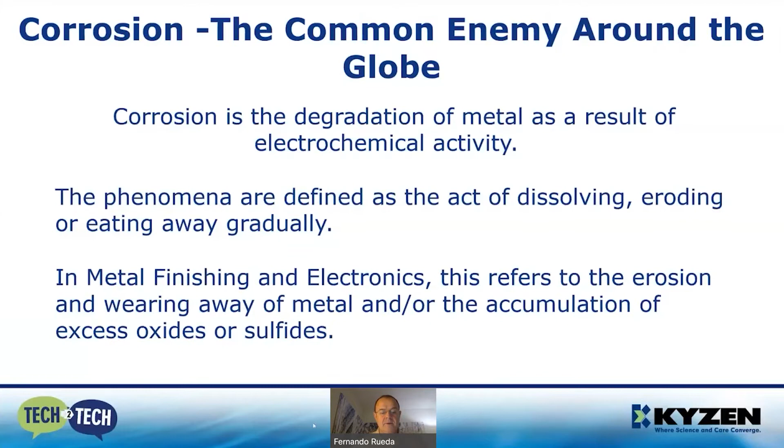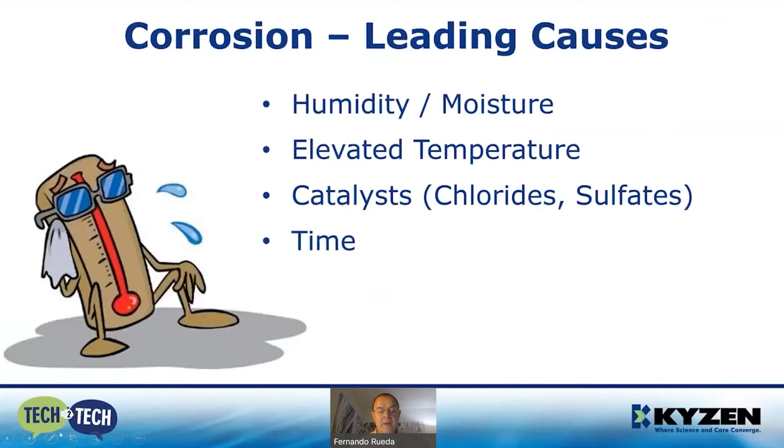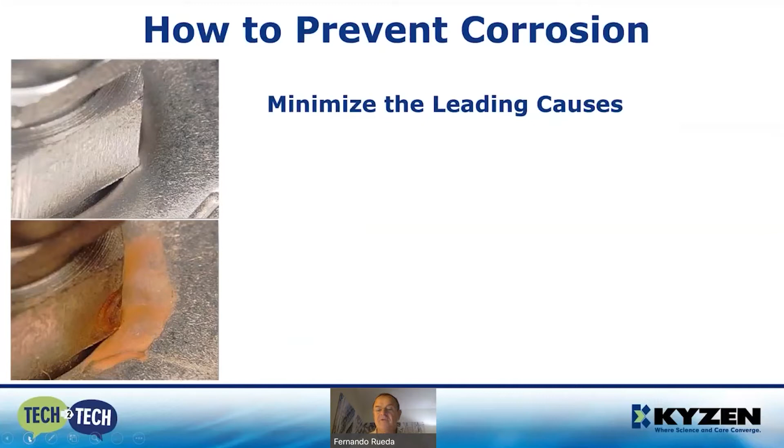So what are the leading causes for corrosion? We have humidity, one of the big culprits, elevated temperatures, catalysts like chlorides or sulfates that can be contained in some of the contaminants, and time. So how do we prevent corrosion? Obviously, we like to try to minimize the leading causes, which are the ones that we just mentioned: humidity, temperature, different catalysts and the contaminants, and time.

So what can we do? What are some of the best practices that we can implement to try to prevent corrosion? First one, and very important, is try to remove all the soils and contaminants from the parts that we're cleaning. Then we're going to apply a corrosion protection product. That can be done in the wash, in the rinse, or both. We need to allow for proper contact time in the process so the corrosion protection product is applied evenly across the surface of the part, in all the orifices, and basically the complete geometry.

We need to make sure that the corrosion protection product is the right one for the specific metal or metals that we are trying to clean and protect. And that could be steel, brass, aluminum, copper, and others. And lastly, one of the best practices that we can implement is package things properly. We need to make sure that the parts are cool and dry so they don't start generating moisture inside the package. And we can always use desiccant packing materials to try to prevent some of that moisture.

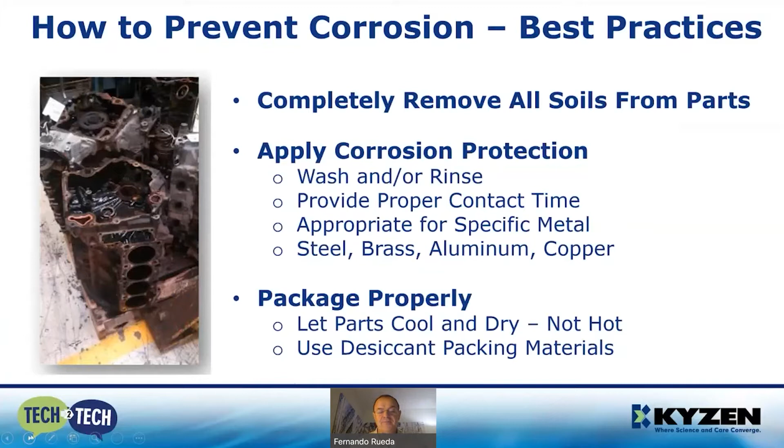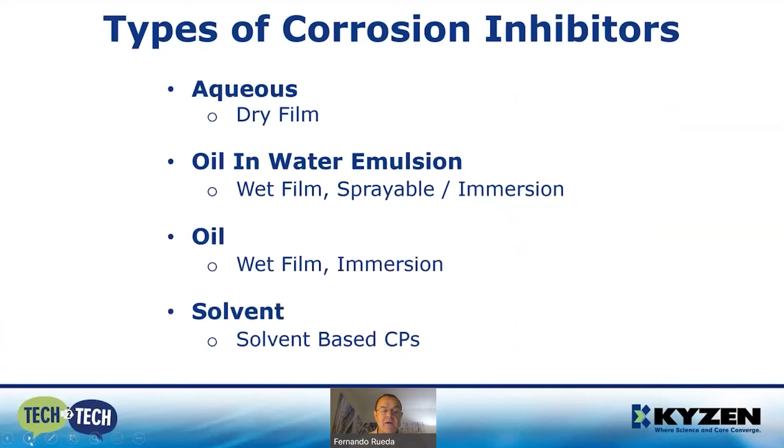So we're going to mention some of the corrosion inhibitors that are available in the market. We have aqueous, which tend to leave a dry film on the parts. We have oil in water emulsions, which tend to be sprayable or can be applied in immersion too. They typically leave a wet, oily film. Oil-based corrosion protectors are typically applied in immersion for the most part, and they also leave a wet film, kind of oily. And lastly, we have the solvent-based corrosion protectors or inhibitors. These are the ones that we are going to concentrate on because these are the ones that are used in vacuum degreasers. So let's talk a little bit about the vacuum degreasers.

Vacuum degreasers are completely closed loop systems that use vacuum in the cleaning process, and they're typically used for machine parts, screw machine parts, etc. The industry is moving in that direction because they're trying to replace legacy halogenated solvents that are considered either ozone depleters or environmentally detrimental, or for safety purposes, like PERC, TCE, nPB, etc.

Another reason is that people are trying to replace water-based systems for different reasons: consumption, discharge, the wastewater. Dealing with wastewater can be complicated in certain areas and certain cities or regions. Operation cost, energy, a variety of reasons for replacing the water-based cleaning processes. And also, safety and environmental regulations are forcing people to go towards safe non-halogenated solvents.

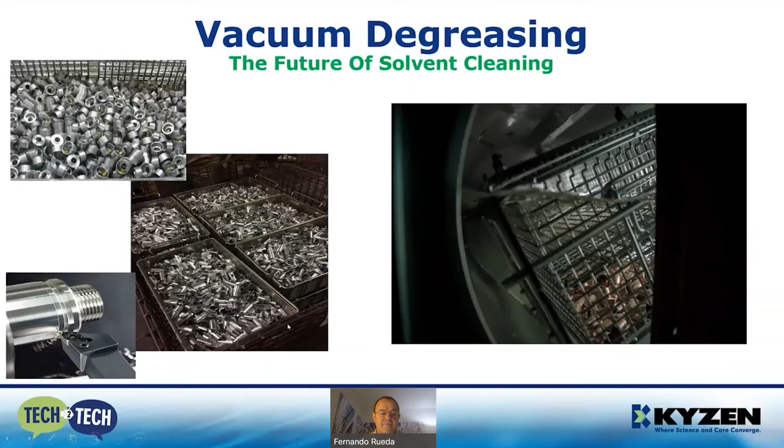So we know that like dissolves like. We have two types of products that are typically used in vacuum degreasing systems. For polars, anything water-based that you apply to your parts and needs to be removed, you're going to need a modified alcohol. If you are dealing just with oils and greases, you can use a product that is good for non-polar residues, like a hydrocarbon.

The benefits of these systems are going to be no water use. If you don't use water, you're not going to have to deal with the wastewater. The waste that you're going to generate is minimal, just the contaminants that the parts have, nothing to do with the solvent or the material that is being used to clean. It's going to allow you to have very low corrosion potential.

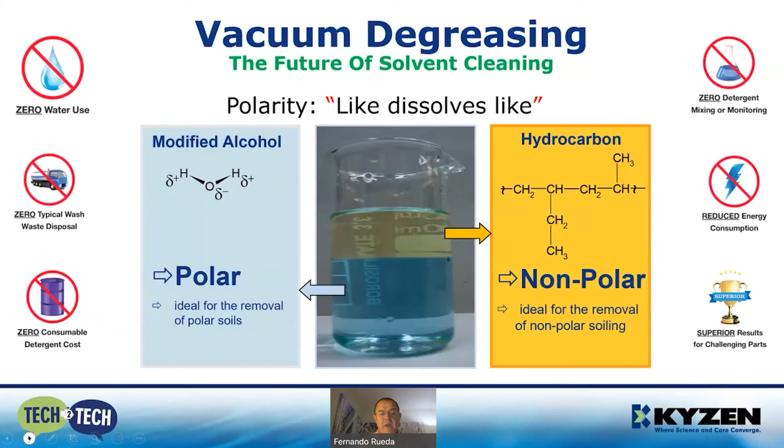So how do the CPs apply in these systems? You're going to have a CP tank that contains the solvent, whether it's hydrocarbon or modified alcohol, and it's going to have a certain concentration, depending on your process, of this corrosion protection product. Typically, you're going to apply the corrosion protection product after cleaning and rinsing the parts. So the chamber will be filled with that, and it will be applied evenly across the geometry of the part.

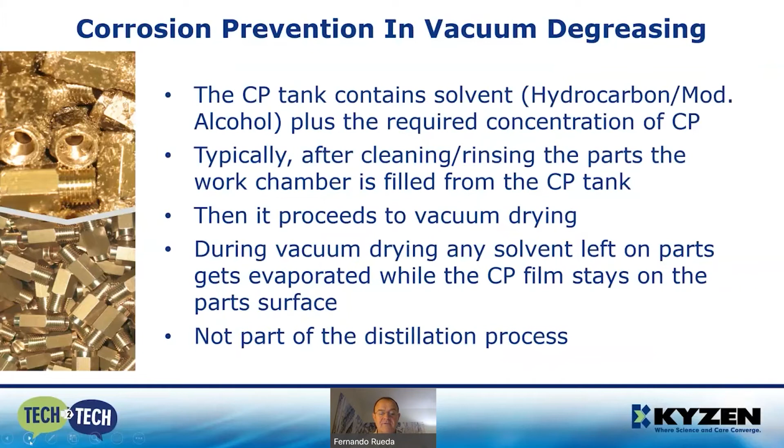After that, you're going to go into vacuum drying, and anything left of the solvent is going to be evaporated, and you are going to be left only with that protection on your part. Just a film, typically dry. So one important factor to consider in this process is that the CP tank cannot be in the distillation loop of these vacuum degreasers, because you will lose the corrosion protection product in the process. So very important.

This is a typical schematic. You're going to have a couple of wash tanks that are used for wash and rinse. Some machines have 3 cascading tanks, but most machines have 2 tanks, and they tend to be isolated in many cases. You're also going to have the CP tank, which is optional. You will have to request it when you order the machine. You're going to fill the chamber with that CP at a concentration of 2 to 10%, typically, depending on your process, on how much protection you need. And you can always optimize this process.

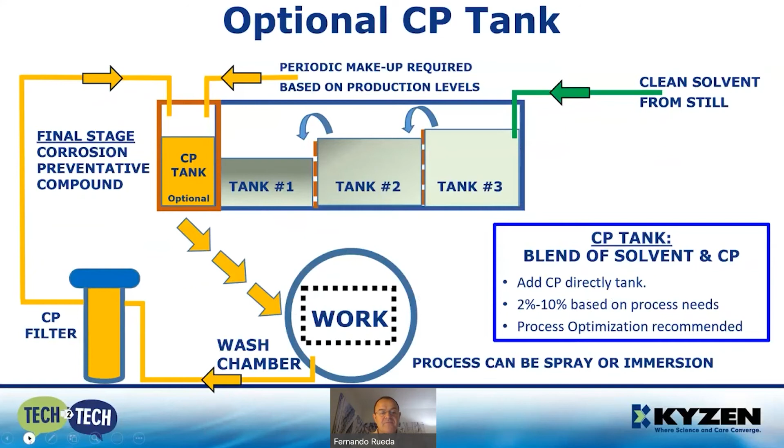So the corrosion prevention products are typically used for steel and cast iron, but can also be applied to different metals, aluminum, copper, and others. It's typically 100% soluble in the solvent that you have in the system. So that's what you're going to have in the CP tank. And you're going to get, as I mentioned before, a uniform protection layer on the complete part geometry, given the proper time in the tank. The CP film is going to be dry to the touch for the most part, and the thickness of the film is going to depend on the concentration of that CP product.

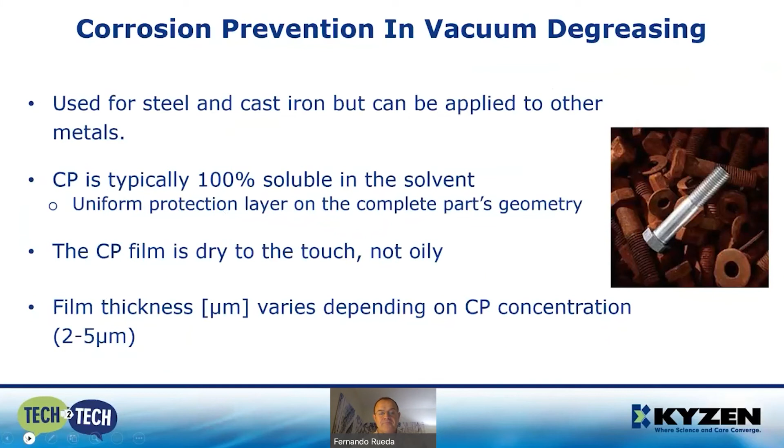How do we measure that concentration? We like to use a moisture analyzer. It's basically a precision scale and a micro oven where you're going to bake the volatile items, and you're just going to be left with the solids that are contained in the mixture that you are testing. The measurement will be automatic, and it will be provided in a percentage of weight. And what do we do with that reading?

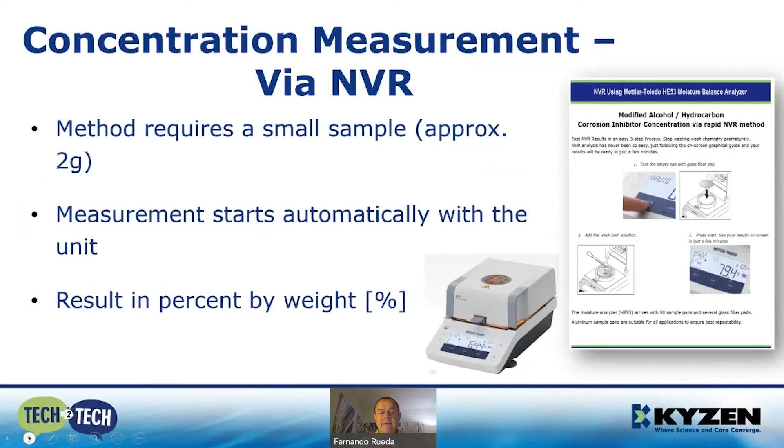We're going to apply that reading to this chart. I'm going to use some random numbers so you can see how easy it is to get the concentration of the CP. Let's say that we have a 1.24% NVR reading from our test with the moisture analyzer. We're going to draw a line across until it meets our curve here, and then draw another line to the x-axis, and we'll see what the concentration is. In this case, 1.24 NVR gives us a 3.5% concentration of the CP.

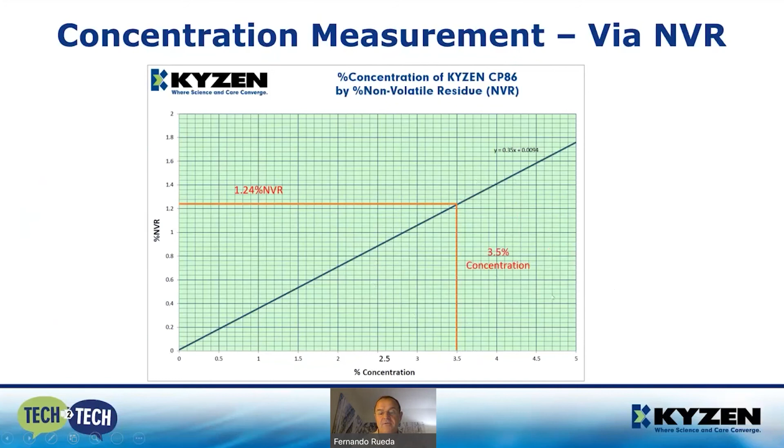So bottom line, when we need long-term protection, months, even years sometimes, depending on the application, these CP products tend to be very good, very efficient. These products are based on oils, fats, waxes, in conjunction with the solvent that you're using in your process. They can be concentrated waxes, or pre-diluted, which tend to be more convenient because you don't have to melt the wax to mix it with the solvent.

And you can use this type of CP product for both hydrocarbons and modified alcohols, but you need to make sure that you select the proper one so it's 100% soluble in the solvent. And a key part of the process, as I mentioned before, is to keep the CP tank isolated from the distillation loop so you don't lose your CP product.